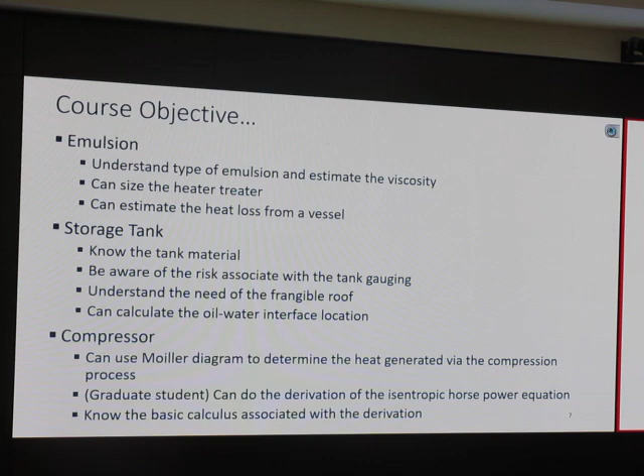The content of the exam is comprehensive. Lecture 1, we talk about safety and engineering ethics. I think that will be in true or false format. I cannot have a calculation question on that.

The thing about ethics is you've got to know that even if we are not a PE, we abide by this rule. The fundamental canon: engineers, in the fulfillment of their professional duty, shall promote the safety, health, and welfare of the public, and so on.

Say something good, I think it's very... I don't try to play any trick. If something is ethical, say it is ethical. If it doesn't look ethical, it's not ethical. Just that. There's no trick to this.

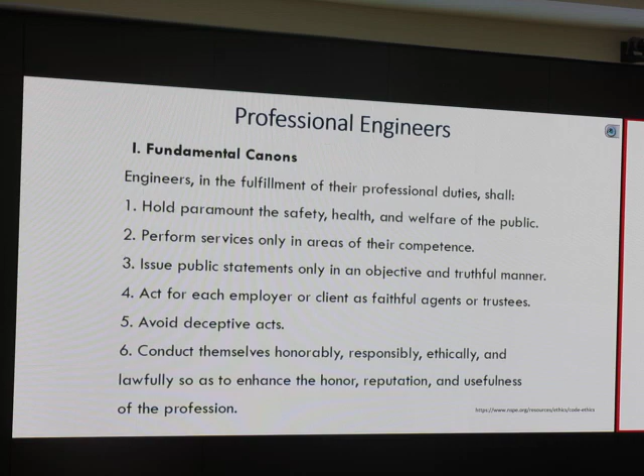This is the purpose of the very first lecture. Try to review that.

Second one, I'll go to 2.5. This is a presentation made by GNT. We talk about the average molecular weight.

You're going to be able to do this, okay? If you cannot, I would like you to stay with me. So, weighted average molecular weight is a weighted average based on mole percent or volume percent, not mass percent.

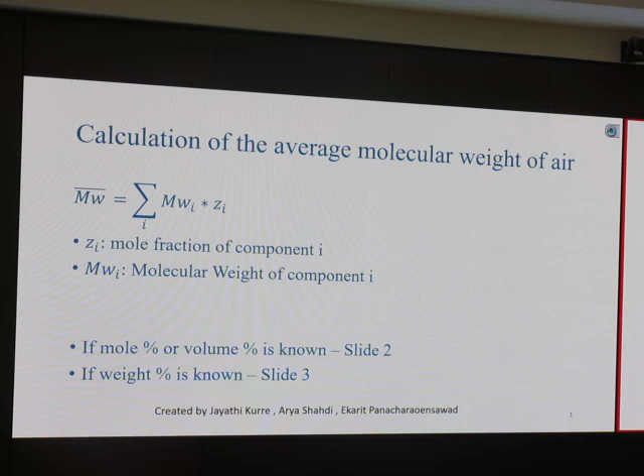We talked about this, right? How to do each column. You got it? Yes? You know how to do it. That's number 3, number 4, number 5, number 6. So, mole percent is the same as volume percent. Alright? Mole percent is the same as volume percent.

If the weight is given, I think you have the exam solution, right? Did you review that exam solution? Please, the exam solution, not the midterm exam. How do we go from weight percent to volume percent?

It's weight divided by molecular weight, right? Because look at column 5. Column 5 is - what do you do? Actual weight of the component is mole percent multiplied by molecular weight.

But if we want to go from weight percent to volume percent, it should be that divided by that, okay? So we have weight divided by molecular weight. And then that will be kind of volume fraction.

So we want mole or volume percent, but you have the formula there for weight percent. If the composition is given in weight percent, the formula that's up there is not the one that you use directly for the test. You should know that it's the same thing. Do you understand what I'm saying now? It's not directly the one that you use. It's indirect.

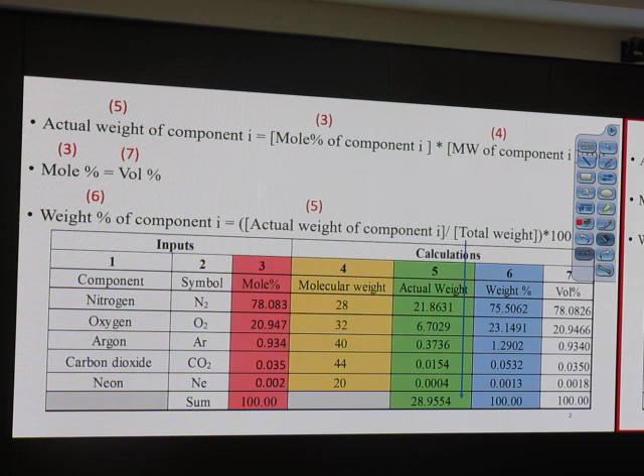This is like: mole percent equals number of moles of component i, equals weight percent divided by molecular weight. So I have that over that, and I get that moles at column 5. And I get the total of that.

Then 2.6967 divided by that, multiplied by 100, equals that. You do it for all of them. So try to do this.

By the way, I promise you I won't give you this directly. At best I will tell you nitrogen - nitrogen is N2, not N, okay? Nitrogen is N2, not N. And you will know oxygen - oxygen is O2. It is your task to write those in.

And the component is like C1 to C5, and you should know, okay? What is C1? CH4, right? C2, if you don't remember - each carbon has 3 hydrogens. So this must be C2H6.

The formula for an alkane is CnH2n plus 2. So this would be methane, ethane, propane, butane, pentane. Do you know how these names work, right?

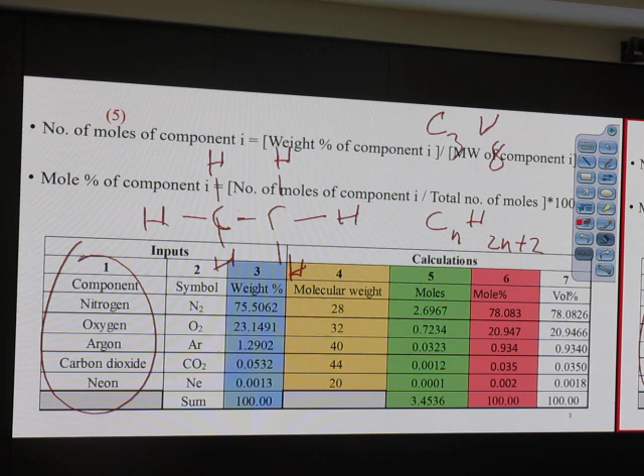So the trap may be, will you give us the molecular weight? No, I don't give you the molecular weight. What, will you give us the molecular weight of carbon? No, I don't give you any of that.

I promise, I want you to write it down, okay? We're supposed to know what argon is? Oh, okay, write it down. What's the big deal?

Can we bring up your exam? No. Everything that you put in, I mean, can we print it? No, printing. Everything has to be your handwriting. Everything has to be your handwriting. Okay, all those 8 pages have to be your handwriting.

Come on, there is limited time. Okay, the thing that is fair for the test, no question yet, the thing that's fair for the test is the word methane, ethane, propane, butane, pentane. Those are fair for the quiz. In addition to that, the word nitrogen, the word carbon dioxide, the word oxygen, and argon and neon.

That's a fact, I don't think it's in the test, but if it is, I'm not gonna tell you that it's 40 and 20. That's it. The rest of that, okay, helium is 4. Most of the time those things is unlikely to be in it. But right now you know that argon is 40, neon is 20. I don't confirm it, but I don't think it's in the exam. But okay, write it down for you to feel happier. The word nitrogen, if you put nitrogen as N, not N2, then it would be 14 instead of 28, right? So you're going to know that question.

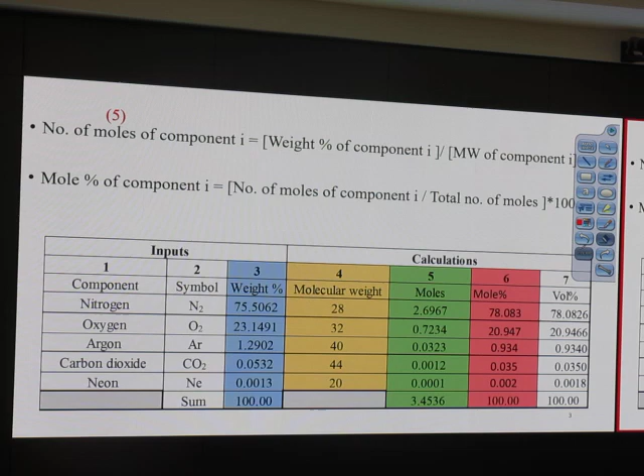This is 2.5, number 2. Oh, where's number 2? This is number 1. Number 2, so this is about facility.

A very popular question is, when do we choke flow if we have a single pass line heater? Before the line heater, or after? We heat it, then we choke. We don't choke before heating. Okay, whatever I say here.

This is when it doesn't form hydrate. If we have a line heater, we heat it up before we choke it. Or we can heat it for split coil, we can heat it, choke it, and heat it again. That's for split coil. Single pass, we just heat it, and then we choke it. All right, that is single pass coil.

You remember that? And last year, two years ago, I think we asked about indirect heating and direct heating. Line heater, is it direct heating or indirect heating?

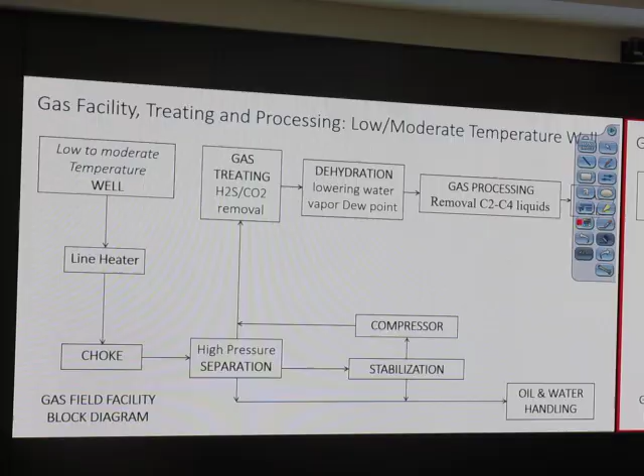Line heater has water inside. You remember? Line heater has a water bath thing. That's it, it is not in this line. Okay, line heater has water bath, so it's indirect. Heater treater doesn't have water bath, so that is direct, okay?

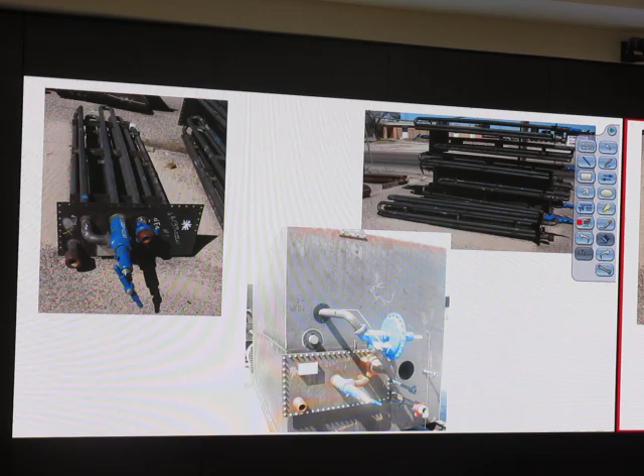Hydrate inhibitor, Joule-Thomson. What is Joule-Thomson? What is Mollier diagram? Mollier diagram is a chart of enthalpy and entropy. That's the Mollier diagram, right? Okay.

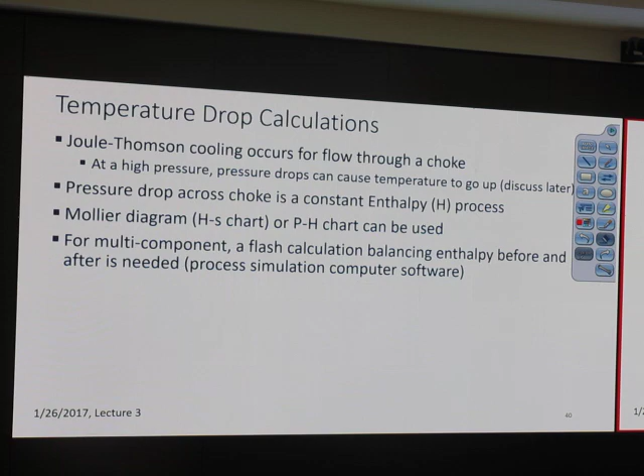What is Joule-Thomson? Joule-Thomson cooling. Joule-Thomson is the change in temperature due to the pressure drop across the choke. That is one way to express Joule-Thomson. It can also be expressed as the decrease in temperature when we have a significant pressure drop. Typically, flow across the choke is at a constant. Constant what? S or H? H. Enthalpy, okay.

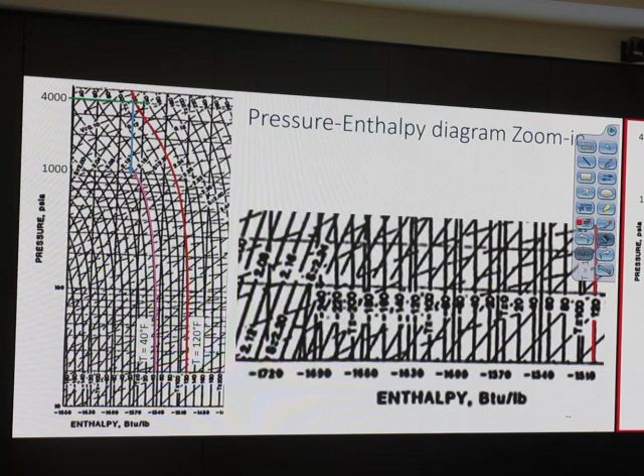This is a P-H diagram. I have to zoom in to do this, so it's a little bit difficult to put in an exam. This one is easy. The purpose of this thing, look at the correction factor. Okay, look at the correction factor.

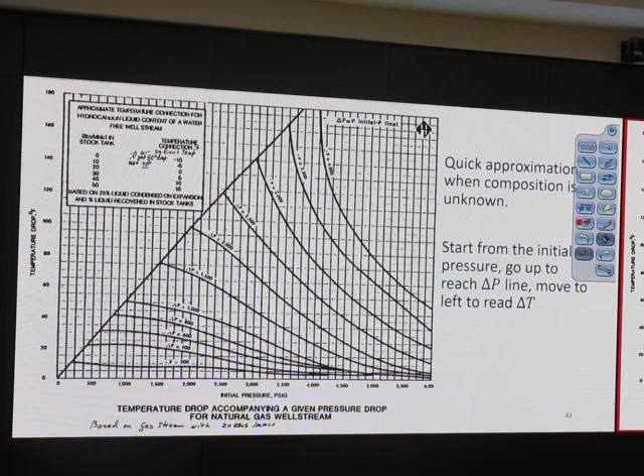If we have barrels per million cubic feet, when we have more liquid produced, we add more temperature over there, you see. So this means if we have a lot of liquid co-produced with gas, there's no delta T, no temperature drop, okay? Got it? Because when we co-produce just 50 barrels, delta T has to be decreased by 15. So you need to know how to use those factors.

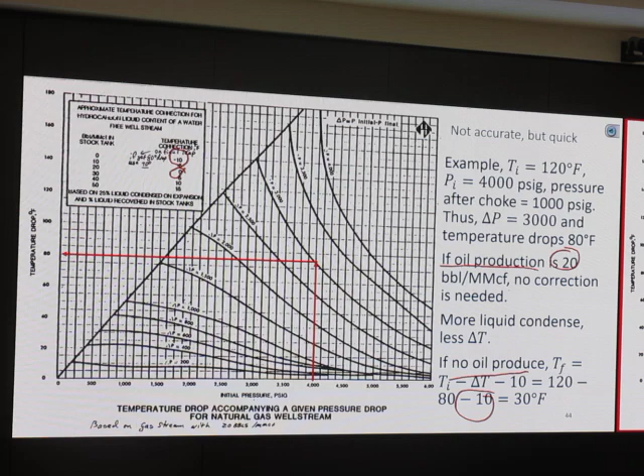Look at this one. If no oil is produced, we do this, and that's the case where we have oil produced. If oil production is 20, no correction. See, no correction. If no oil produced, we have minus 10. Which is that. So we have additional temperature drop if we don't have any oil produced. So this graph tells us that if we have more oil produced, we have less temperature drop. Okay?

That's what you need to know. Okay, this diagram, what is the name of this diagram? Mollier diagram. Mollier diagram is a plot between enthalpy and entropy. Notice that they are specific - enthalpy is per unit mole or per unit mass. Your job is to know the unit, know this unit.

At least just on that day it's okay. Maybe you don't know it now, but the unit of specific enthalpy, the unit of specific entropy, you've got to know. What is the unit of those things? BTU per pound mole. This is BTU per pound mole per degree. What is that degree? S is BTU on the top, pound mole, LB mole, and degree R is on the bottom, right? So that's on the bottom.

You've got to know the equivalent SI for this field unit. In SI, BTU converts to what? Joule, right? BTU becomes J. Pound mole becomes just mole or kilogram mole. Rankine becomes Kelvin, okay, right?

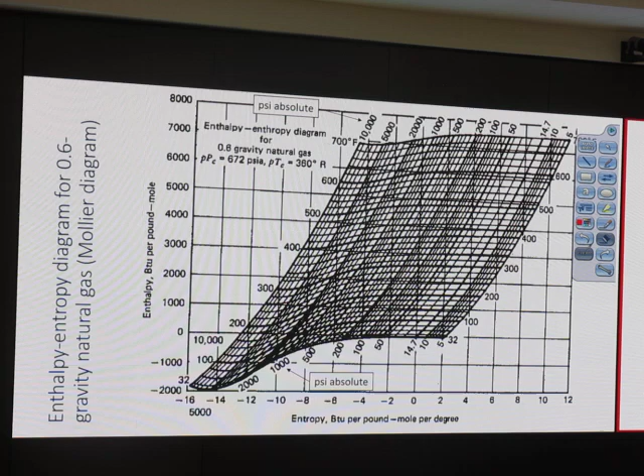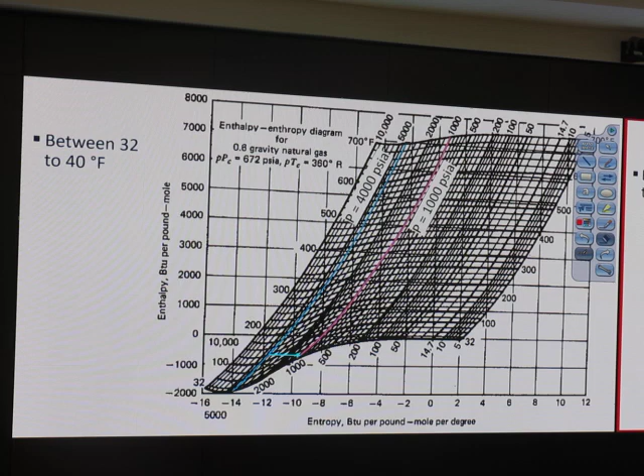You need to know how to read this chart. If you don't know, it's a little bit too late. Okay, this is a constant pressure line, this is a constant temperature line, and this is how we do this hydrate curve thing. There are two charts, this chart and another one. Okay, do we know how to use this? You know that, right? Okay, we have to heat above the dashed line, which is the hydrate formation temperature.

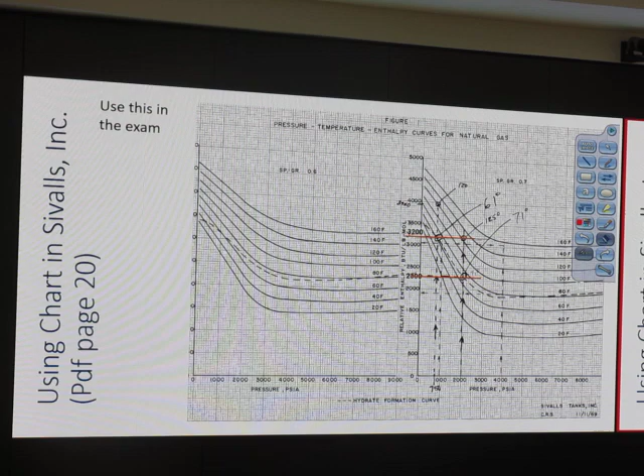Okay, in the calculation section, if I ask what line heater firebox rating we need - this gives me BTU per pound mole, right? This gives me BTU per pound mole, and if I know how many pound moles per day, then I can calculate firebox rating. This is an example, and roughly we have this number. Okay, 1 pound mole is about that much standard cubic feet. If you want to use that number, unit conversion.

Please have the unit conversion from barrel to cubic meter, barrel to liter, all those things you need to write down. Unit of R, what is the value of R? You need to write it down, okay? R has several kinds of values. One popular one we normally use is 10.73, in feet, PSI, Rankine, and pound mole, okay.

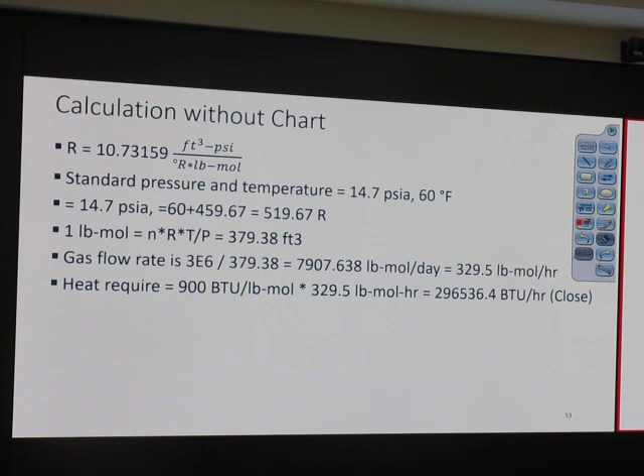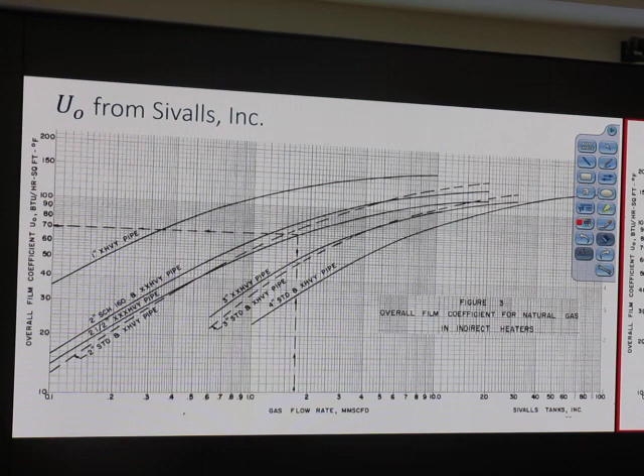Alright. Line heater, and that's the most calculation we have. Log mean temperature - the formula for calculating log mean temperature is just writing the formula, right? Oh okay, this one, 109.9, heat required, BTU per hour.

Okay, this is about the amount of heat in BTU per hour. Use, substitute the gas flow rate over there, right, and have the difference in the specific enthalpy, and then we get Q in that unit, BTU per hour. Good, this is for firebox rating. Okay, the other H comes from those charts.

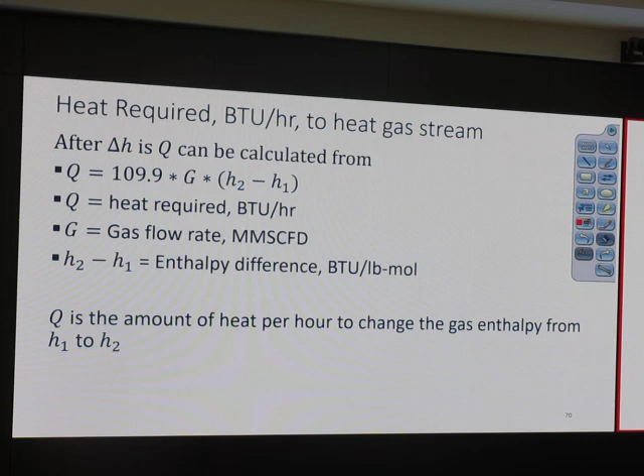Did I promise you that I don't ask about any of that? 109.9 - you remember there was a quiz similar to this, like we talked about density or something, and we have the value of C, and specify the value of C. The easy thing that we did in the quiz twice, got to do that correctly too. Okay.

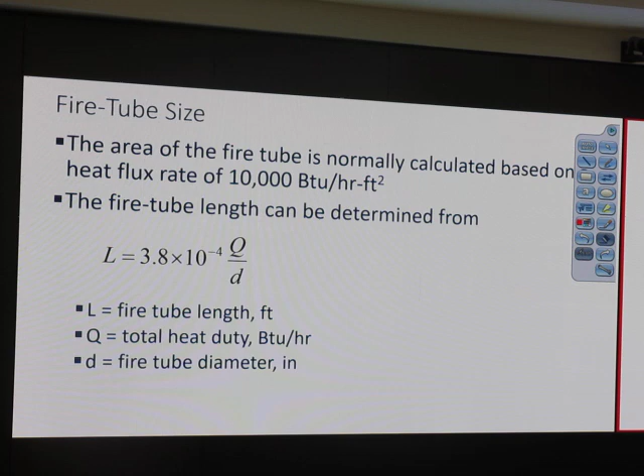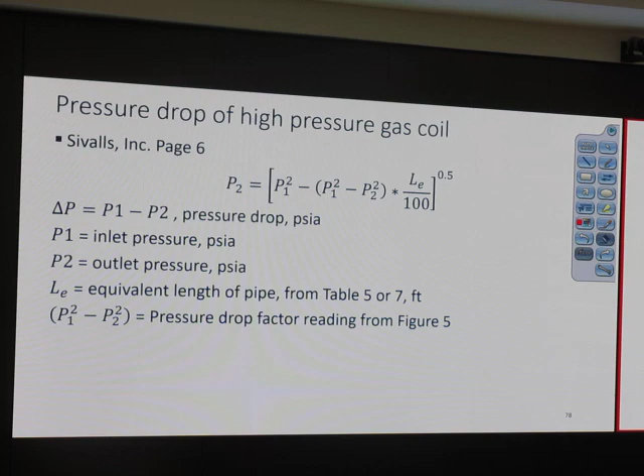Heat duty, add everything, fire tube size - it's just a formula. Did we test it last time? I don't think we had it last time. Pressure drop inside the coil, so this is a formula. I think you already have this formula in your information sheet when you take the first exam. And this is how to use a chart.

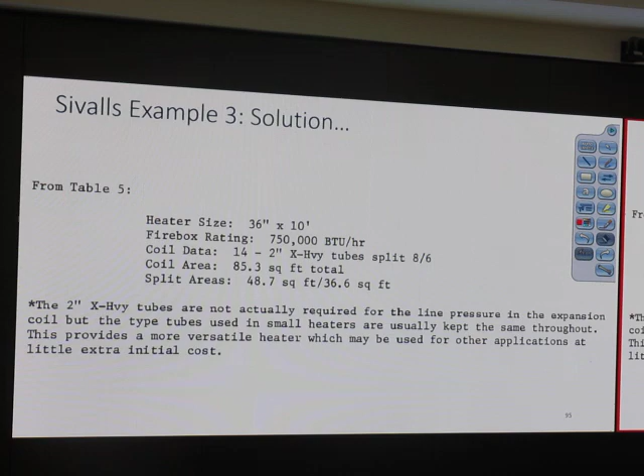You know how to do that, right? You did the example. Oh, okay, erosional velocity.

Erosional velocity has to be compared with the inside actual velocity. If the actual velocity is more than erosional velocity, then we have an erosion problem, right? So this is the way to calculate erosional velocity.

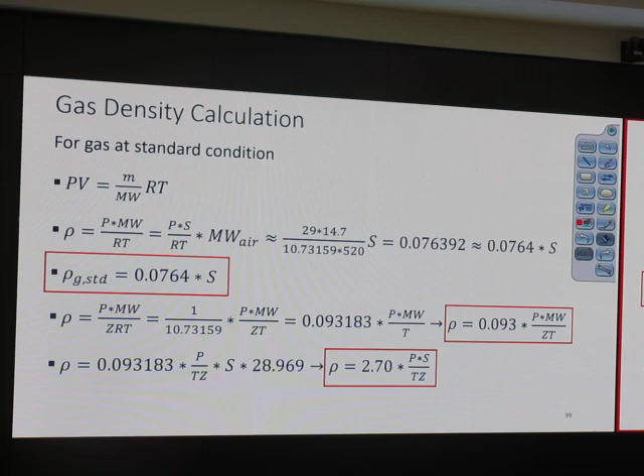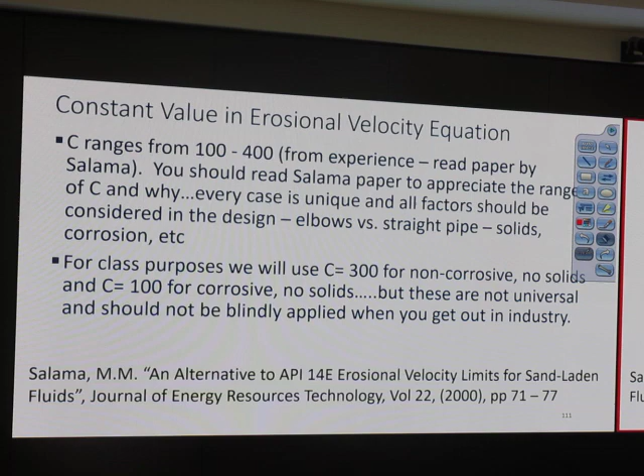The C value comes from a certain table, okay? And that table should be given, I think, 300, 400 or something. If we have it, that C value has to be given, otherwise you cannot select the right choice.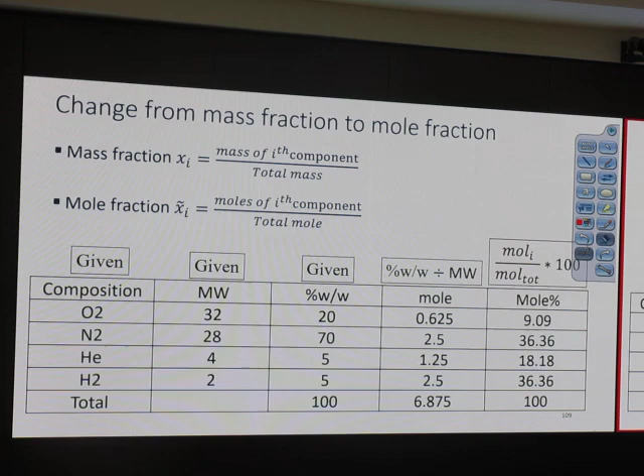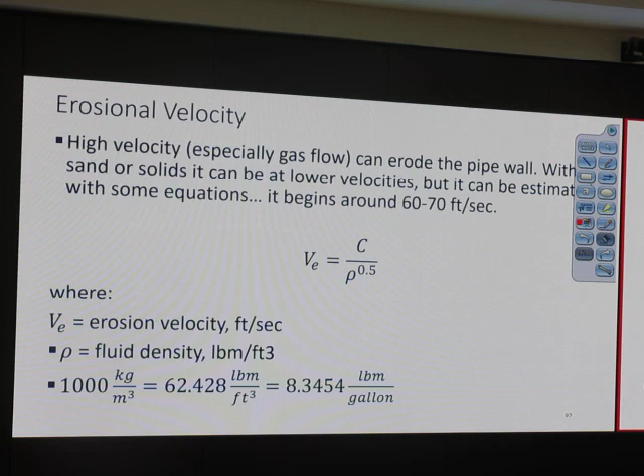Okay, this explains again how do we get each column. Erosional velocity has this formula, C over square root of rho, and rho is pound mass per cubic foot. That's V sub e. I go across this equation, rho equal to something, something, something.

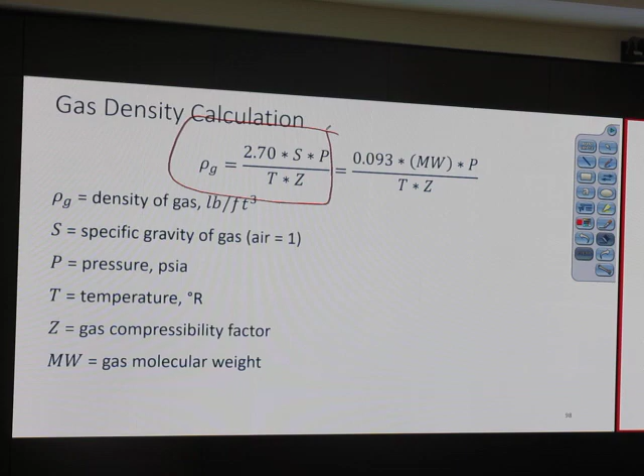Does that matter for you? This is to calculate the density of gas, based on specific gravity, pressure, temperature, and compressibility factor. So this formula is very good, you should have it. It's to convert from specific gravity to density when we know temperature and pressure.

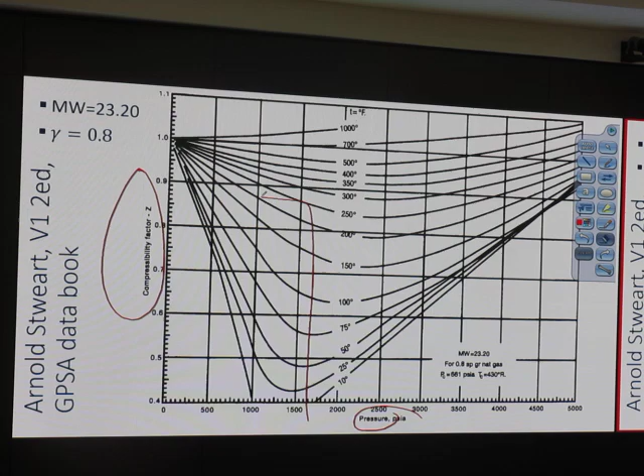Okay, the rest is, what is this thing? Get the Z value, right? You know how to read it. It's the compressibility factor, PSIA, and this is the temperature in Fahrenheit. Just read it, very easy, right? How to read the chart.

Actual velocity. Okay, this one is very popular in previous exams. 60 multiplied by Q, G, T, Z over D square and P. So this accounts for, this automatically converts from actual standard flow rate to the in situ flow rate, correct?

It converts from standard flow rate. Standard flow rate is at the standard pressure and temperature, and then it's converted to in situ flow rate. So even if the standard pressure may not be 14.73, maybe just 14.7 or 14.65, this value is not going to change much, okay? It changes a little bit.

So this gives me the velocity in the unit of feet per second. This is for gas, okay? And that P is the pressure in PSIA, okay? That D is in inches, T is Rankine.

What do I do with this equation for multi-phase flow? Can I use that for multi-phase flow? Of course, I have a chart that has VSL, VSG, okay? If we use this equation, that is equivalent to assuming that only gas flows through a pipe. Then it gives me superficial gas velocity directly.

So if I tell you, hey, I have 1 million standard cubic feet per day flowing through a pipe, the temperature of gas is something, something, pressure is something, something, compressibility factor is 1, the inner diameter of the pipe is 3 inches. In addition to that gas, I have oil flowing in the pipe, oil flowing at like 50 gallons per minute or something. You use this formula and convert from feet per second to meters per second, then we can read the flow pattern map. You remember?

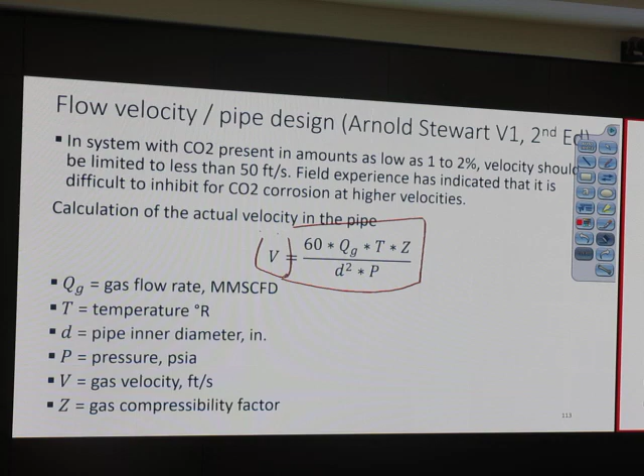Flow pattern map is the plot between VSG and VSL. We will review more about it. But this is the equation to get the actual velocity inside the pipe, if it is single phase flow. If it is two phase flow, it gives you the velocity as if gas is the only phase, which is the superficial velocity. This is how it's derived.

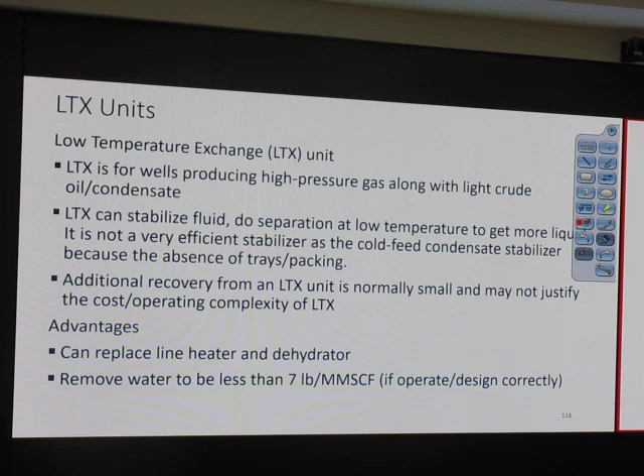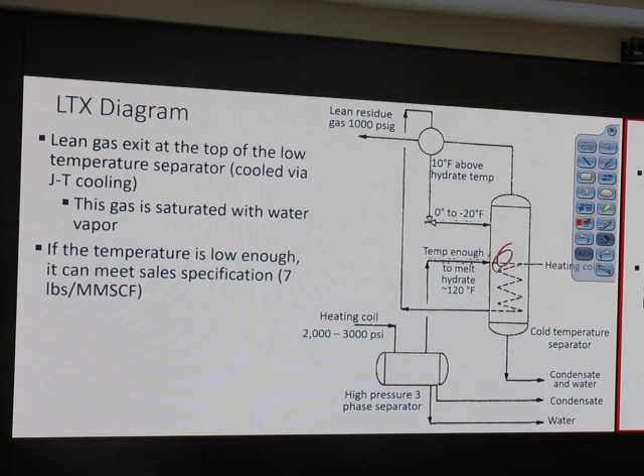LTX unit, know the name, of course. Low temperature exchange unit. You need to know the diagram, okay, I think I have some correction, but the choke is inside this or something. This choke, we choke inside and it has a temperature drop.

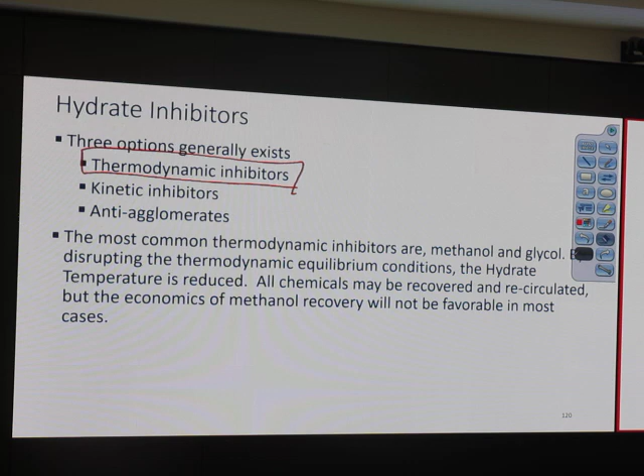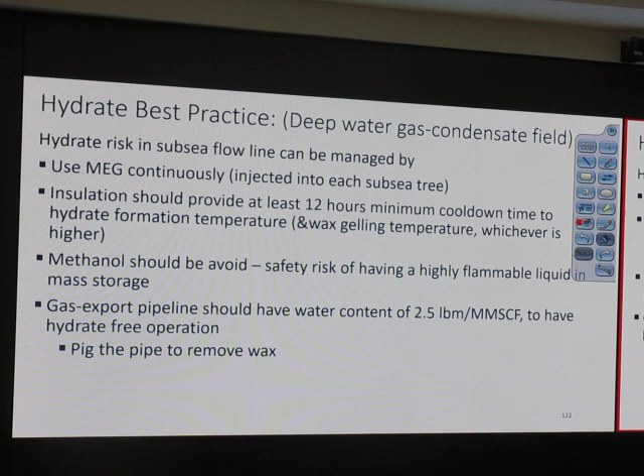And what is the equation that comes with this? Hammerschmidt equation, right? Hammerschmidt equation is for calculation of thermodynamic inhibitor. Okay. Kinetic and anti-agglomerate, we just buy it. LDHI, low dose hydrate inhibitor, it's been put in a little bit and it just works. We kind of skip that, right?

Hydrate best practice. Oh, we have this thing. For you, the K value will be given if we have this. Okay, this is K value for Hammerschmidt equation. Your job is to know how to use this equation.

Okay. The other thing is the depression of hydrate formation temperature. MW is the molecular weight of inhibitor. Molecular weight of inhibitor, methanol is 32. I will give you that, I think I give you that. Okay, methanol is 32, K value, I will give you that.

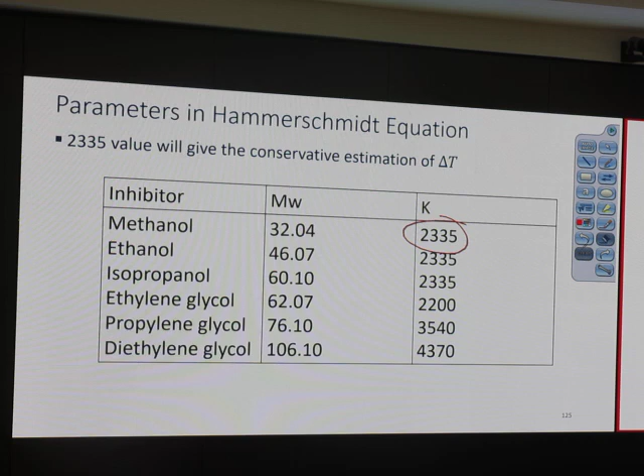So this has to work with what? Hydrate formation chart, right? That is a diagram that tells you, okay, if my hydrate formation temperature is 60, my flow rate is, my actual temperature is below that, then I have to add more inhibitor until my hydrate temperature goes down or something. You know how to do that? Yes? Yes.

No. Assume that my flowing temperature, current temperature, is 60. Okay? Hydrate formation temperature is 63. T hydrate, where's the T hydrate come from? Reading the chart. What chart?

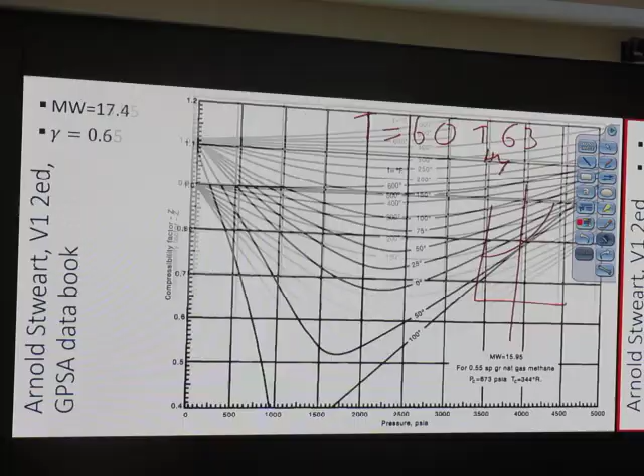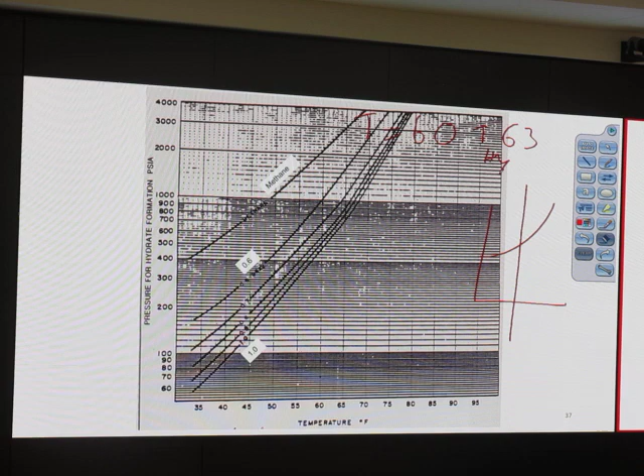This chart tells me hydrate formation temperature. If it's in the exam, it will be given.

Let's say we use that chart and find that hydrate formation temperature is 63, and our current temperature is 60. What do we do? The instruction will say we need to drop the hydrate formation temperature. To be safe, company policy says we have to flow at about 2 Fahrenheit above hydrate formation temperature, or maybe 5 Fahrenheit, or some other number above hydrate formation temperature.

So let's say my company says I have to flow at about 5 Fahrenheit above hydrate formation temperature. This means I have to add inhibitor until the hydrate formation temperature becomes 55. If hydrate formation temperature becomes 55, this means it's 5 degrees below the current flowing temperature, so this makes the delta T equal to 8.

That's my equation. We put 8 over there. We know everything else, so we can calculate W, the weight percent of inhibitor in the final water.

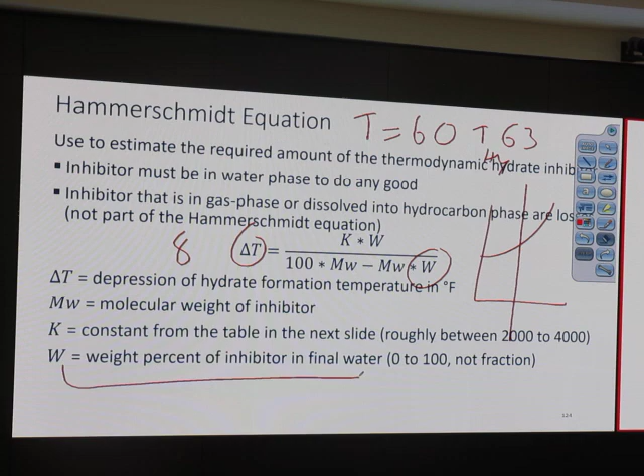I noticed there's some quite a big approximation here. In the way the example from Arnold Stewart is done, I won't penalize you for it. So W is the weight percent of inhibitor in water, not in water vapor. It's in water liquid, not in gas, not in liquid hydrocarbon. It's in water liquid.

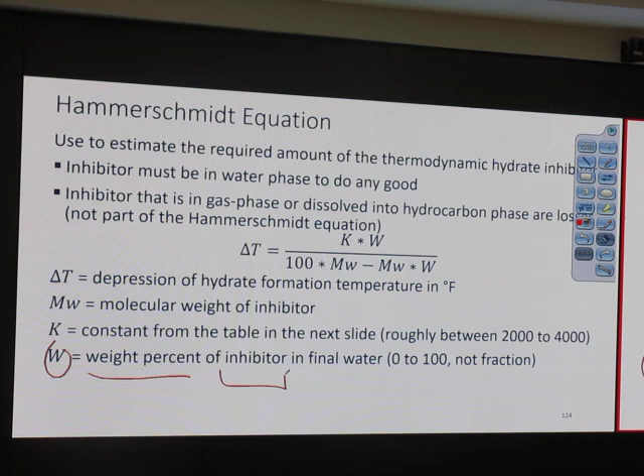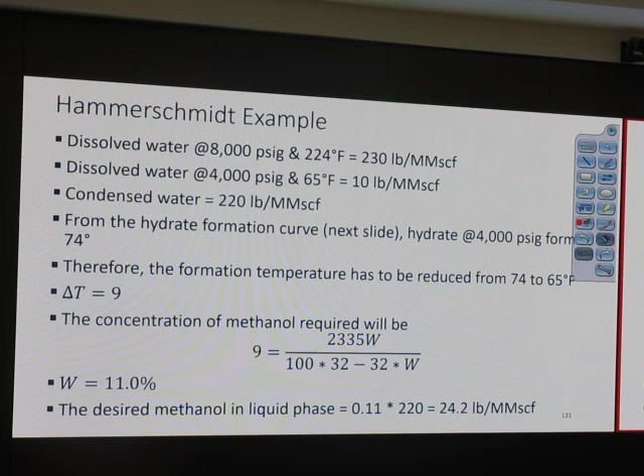But in Arnold Stewart they assume and neglect that. I'll tell you exactly how to do it in the exam, don't worry about it. If you follow this instruction, I cannot penalize you, because I don't have to do any correction at the last minute. This will be changed in the next version.

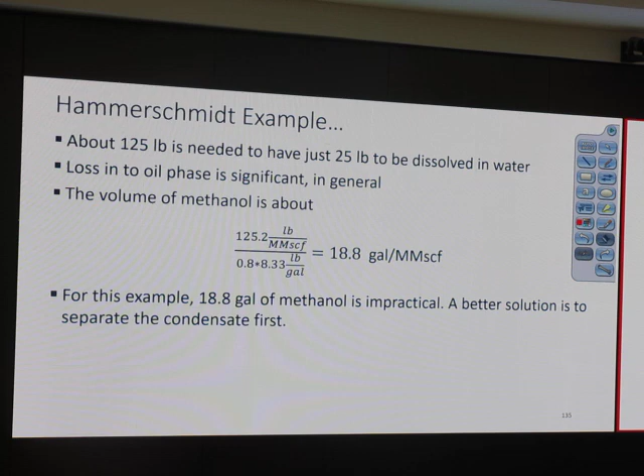The rest of it is a bit more about how much methanol goes in. Did we have this in the midterm exam? No, I don't think so. I don't think we calculated that in the midterm. Then it should be in the final exam. It should be somewhere - did we do it on the homework?

But it's already in homework. Yeah, we didn't do it. Okay, maybe it's in the exam again. So this is how to calculate the total amount to do it.

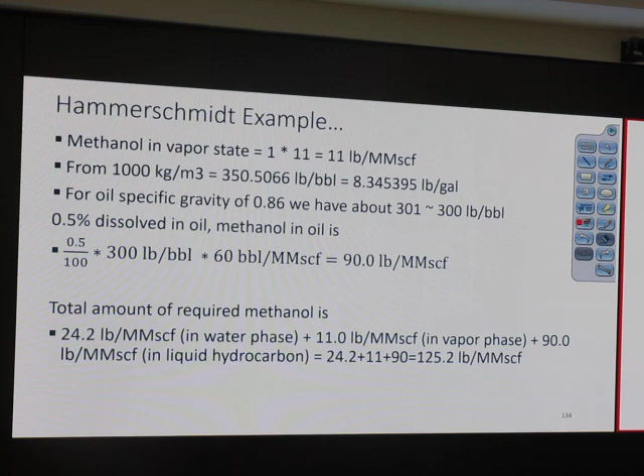This is number 2. Number 3, separator. You have to know the size, the shape, whether it's vertical or horizontal, and the benefits and disadvantages.

You have to know the main internal components: inlet diverter, oil bucket, water bucket, and what else? The mist extractor. And you need to know the location of what's that?

Pressure relief valve. Pressure relief valve has to sense the build up of pressure if the mist extractor gets plugged. You should not put the safety relief valve afterward. Even if that is not in the exam, I think it should help you.

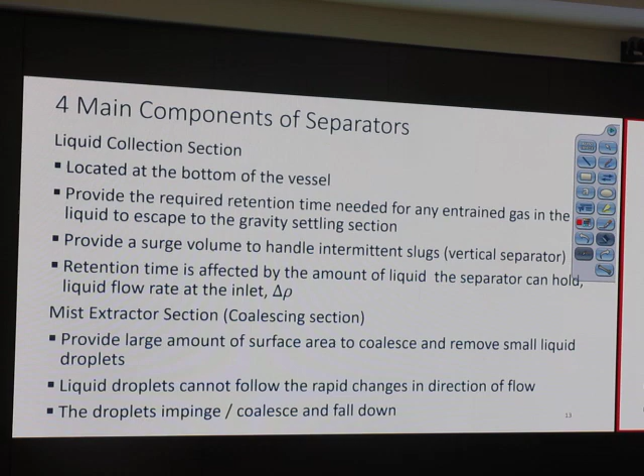There's a pressure relief valve. This is the mist extractor. So if you have the pressure relief valve, it's not there. It should be somewhere over here. You will put it over there, not that thing.

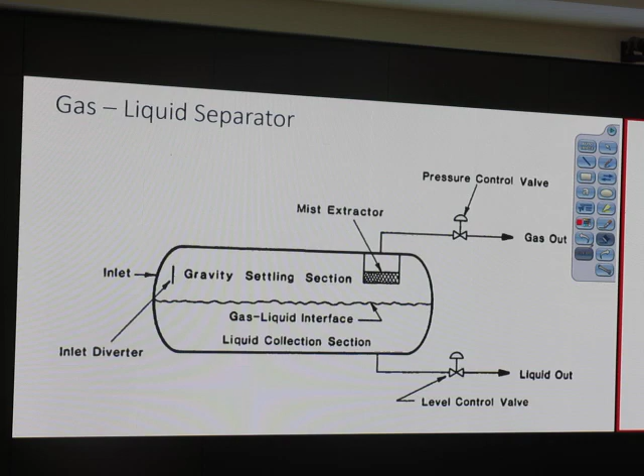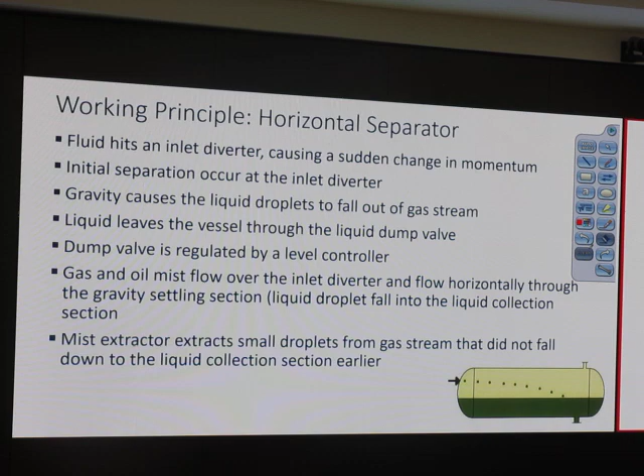Liquid collection section, mist extractor. You just need to know that the mesh type is the cheapest one, right? More expensive maybe the chevron type, and the most expensive will be the filtration type.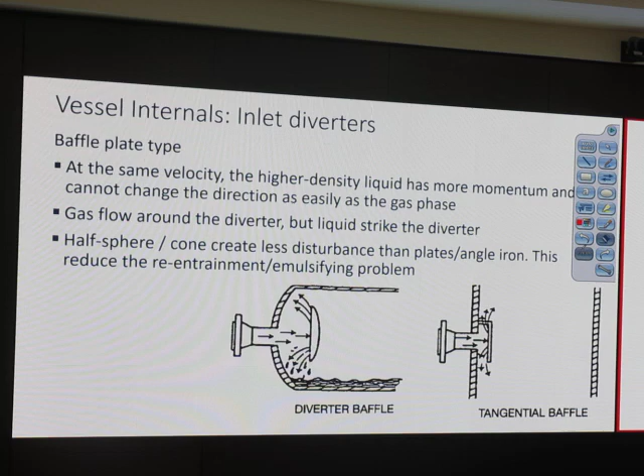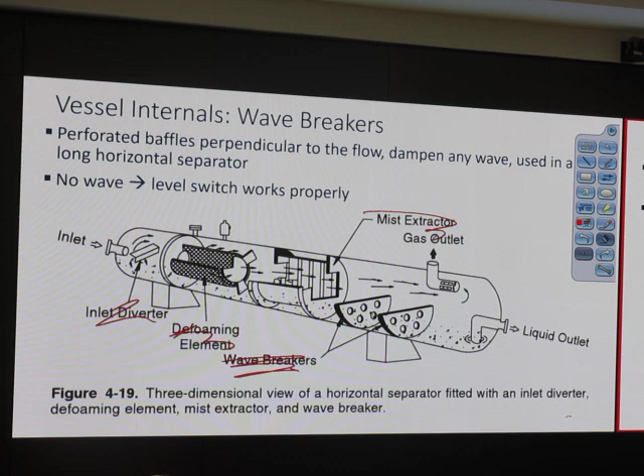This is the diverter, centrifugal type inlet diverter. So if I erase this, you know what it is, right? Defoaming, wave breaker, liquid outlet, vortex breaker. Just need to know the name, okay? Stirring well, mist extractor design.

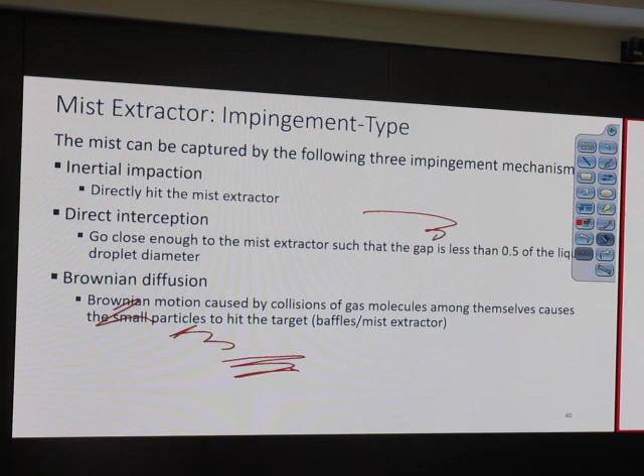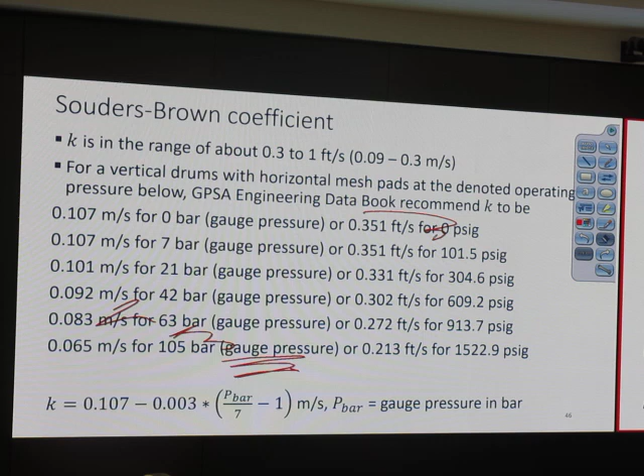This is the Souders-Brown equation. What is that for? Maximum vapor velocity. We should not exceed that. If we exceed that, this means the separator should be fatter, or larger, have a higher diameter.

I may have a chart, I already drew it, and I say, according to the separator chart, we should use the size of blah blah blah blah blah blah, like 36 inches by 20 feet or something. Check if the gas velocity is consistent with the allowed maximum vapor velocity from the Souders-Brown equation or not. You should be able to do that.

True or false, maybe. Maximum velocity allowable, same unit as K, rho L, liquid density, vapor density. How do you get the vapor density? That 2.3 thing, you remember? 2.3 multiplied by something something.

I have the equation rho equal to 2.3 multiplied by something something something, big gamma. You remember that? I showed you the previous slide. It is from the ideal gas law. From the ideal gas law, we can convert from molecular weight to density. So you should be able to use the ideal gas law or that formula to calculate density.

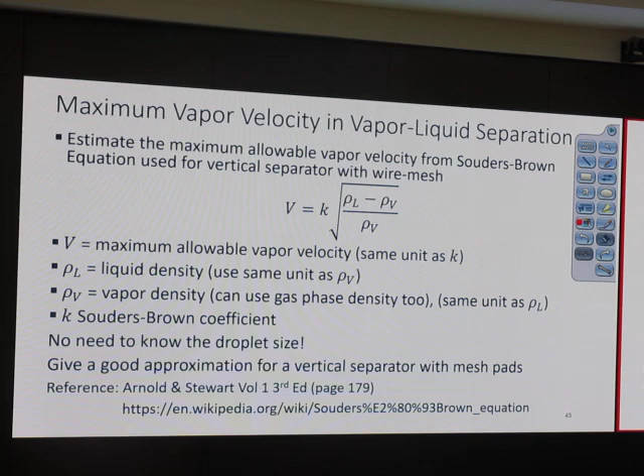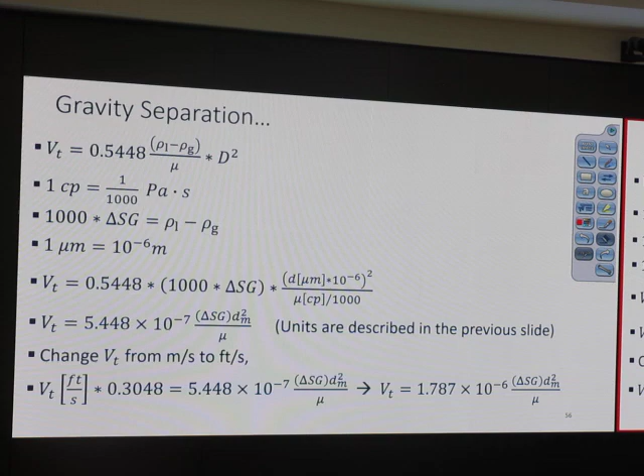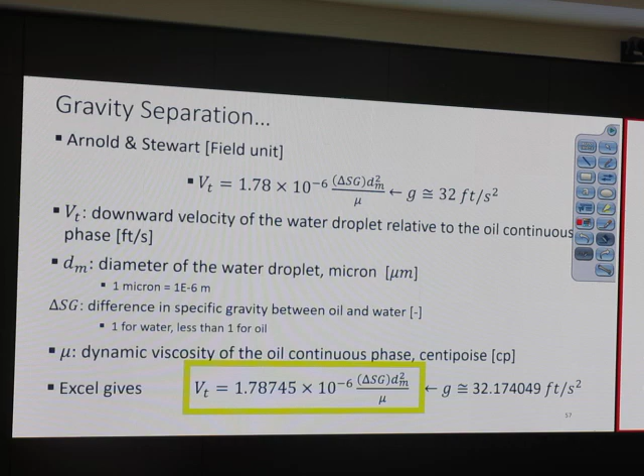There's also the mist extractor settling volume. We have the terminal velocity equation. Do you have that equation already? And if you substitute the value, you don't want to mess up when you do the calculator part, right? Okay, that should be it.

No iteration in the exam, okay, because it cannot be done in 12 minutes.

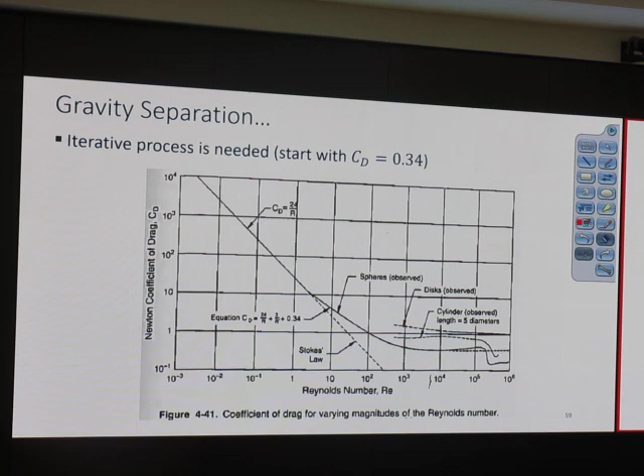The field unit thing, or that number, if you don't know how to convert it, write it down, okay? So this is like the C value thing. But this kind of value to convert takes quite a bit longer than 12 minutes. But if you already have it, I put the yellow box on it, right? So you should write it down.

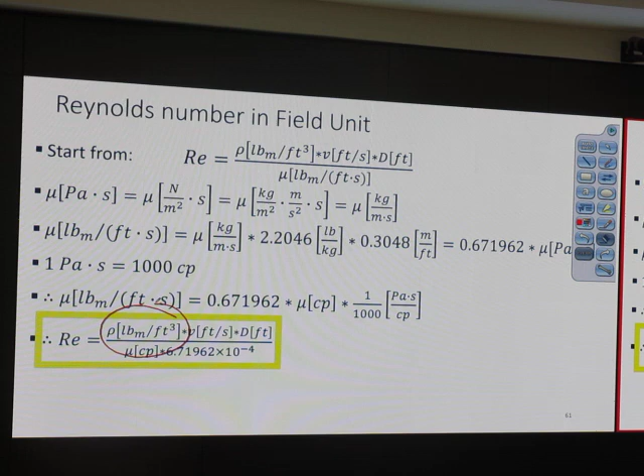So this is to calculate the Reynolds number based on viscosity in a comfortable unit. And of course you have to be able to convert from pound per cubic foot to kilogram per cubic meter. Do you have that? You should have that, okay.

Design droplet, okay, mist extractor removes 10 micron and above. There's also the half full separator, gas capacity equation, liquid capacity equation.

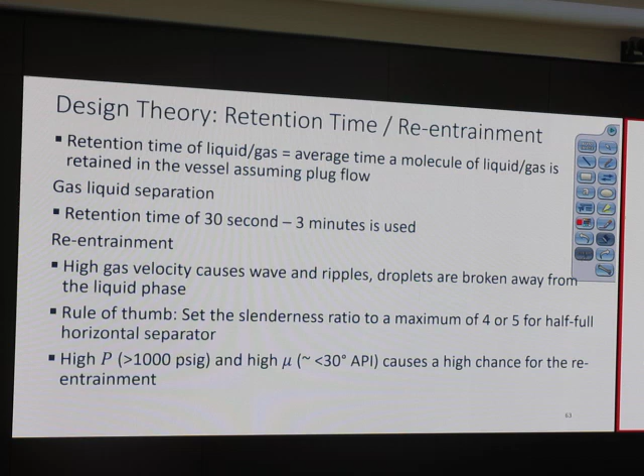So even if the exam is easy, it's just plug and chug, just substitute the value and ask you how much. I may say, okay, use the vertical separator equation to calculate the diameter based on the gas capacity QG. I give you the unit, equal to this, Z equal to this, temperature equal to this. I don't tell you the density, but I tell you the temperature and pressure, and I tell you the molecular weight of the gas, and I tell you CD equal to something, diameter of the droplet is expected to be some value, or d sub m, what is the value of d sub m, defined over here in micron.

The droplet is 10 micron. Based on the horizontal and vertical separator gas capacity equation, what is the preferred diameter? We just put the number in, take the square root, and get the diameter. Seems to be easy, right?

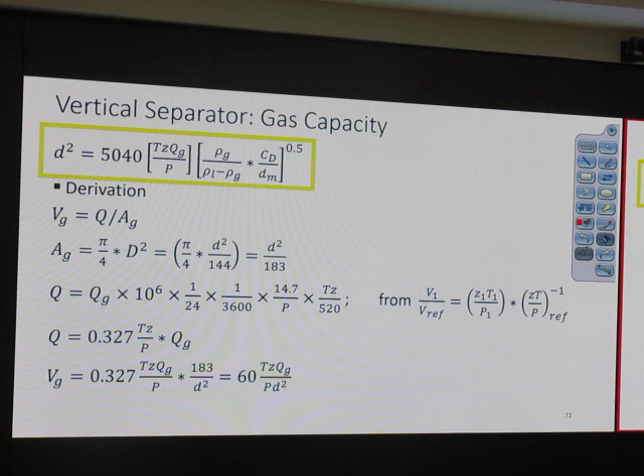It's not easy because there are several equations, and if you don't write it in, you can lose a point. That's my point, right? So basically you should already have it in your information sheet, in your handwriting only. This table.

Did you write down this equation or anything? Or did I tell you I will have it for you? I didn't say anything about it, did I?